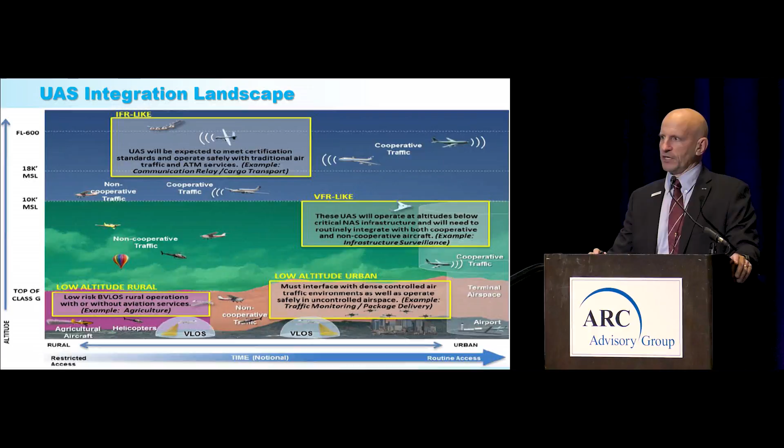And then just a situation of all the airspace where we enable UA to integrate in a non-segregated, non-cooperative, some situations, so that these UAs can detect and avoid one another and move throughout that airspace. Now, to do that, where we are today is looking at operations over people, expanded operations, which mean beyond visual line of sight. So if you want to do anything like an oil line inspection, power line inspection, those kind of things.

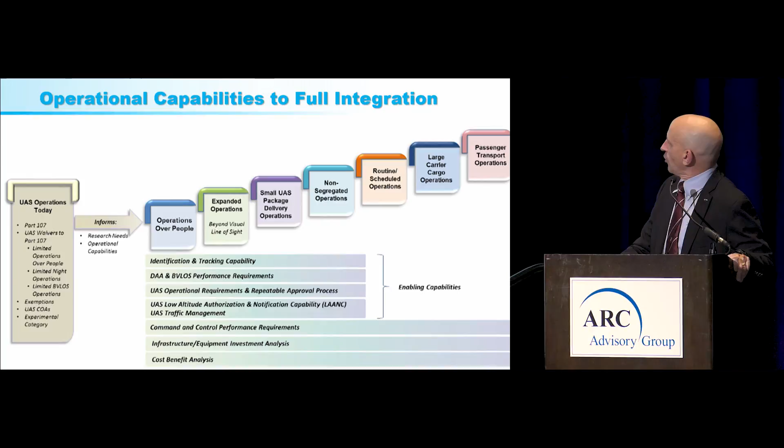And there's a lot of pressure on the FAA and our commercial folks to do small UAS. But we have to do the research and safely define things like how to ID a specific UAV. We were close to flight over people, but then Department of Homeland Security and the FBI said, now wait a minute, how do we know over a sporting event if that's a friendly UA or a bad one? And we couldn't answer that question initially. So we've taken a step back to do detection, flight pointing systems. That's that low altitude authorization and notification called LAANC.

Beyond visual line of sight and detect and avoid, we're going to see some projects that we have in that area trying to actually define what that's going to be to enable anything beyond your visual line of sight, which is a lot of applications in the commercial space. There's command and control performance. We want you to be able to not lose link to your aircraft. If you do, to be able to regain it, but then we don't want a cyber attack to get into that system and easily be able to take over your UA. So there's a lot of work starting in that area.

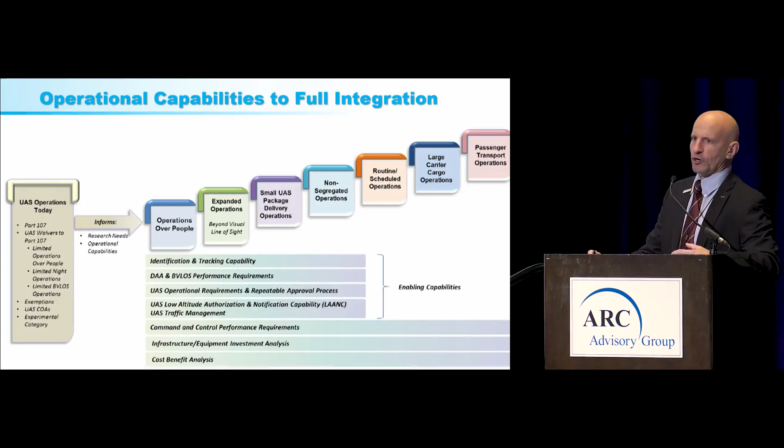So just a quick look at what we've done. Up top, we did some initial certifications, but with Part 107 for the smalls it became not so important. But we started looking into the detect and avoid program. They've surveyed the whole industry, tried to find out what were the needs, and the next phase, what I'll brief on another slide, is we're going to start doing testing to figure out what the minimum standards will be, what are the requirements for you to be able to fly a UAS beyond visual line of sight.

The two studies that I'm going to cover in detail, so I'll skip through now, are the collision severity studies. People are very, very concerned, rightfully so, of what happens when a UAV is flying around and hits somebody in a crowd. What happens when it hits my airplane that's coming in to land? We've done work there.

Maintenance, modification, and training. We've done a lot of work there. An airliner like a 747 has intensive requirements in that area. Obviously, you don't need that for your 2.7-pound DJI Phantom 3. But what do you need? What are the requirements? How do we scale that for the different sizes in between? A lot of work also on human factors, the design of the ground control station.

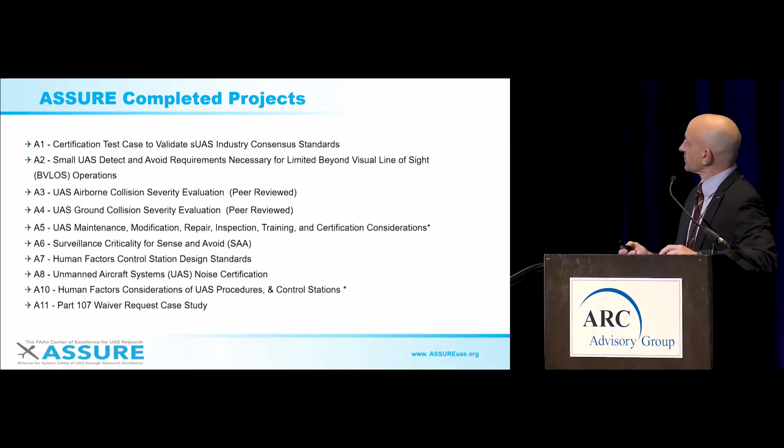So what we have currently going on is the secure command and control link and interference. A lot of concern about maintaining that link, the sanctity of that link, the control of that link, and then if you lose it, how to get it back quickly.

That group is forming the RTCA Special Committee 228, Working Group 2, on what those procedures will be. The FAA will just sign on to what these new industry standards will be. A lot of what we're doing now is not going right directly to the FAA for regulations. We're informing industry standards groups, consensus groups, of our recommendations for what the industry standard should be, the minimum standard should be.

If you move on, we have some follow-on work in the collision studies I'll cover. We do a lot of work in STEM. These kids today just love it - you fly a UAS around, you can teach them math out of that, you can teach them physics, and they won't even know they're learning programming skills. So we've gotten involved in some of that, and we're looking to expand that out.

A couple other issues that have popped up in some discussions is detecting and avoiding, counter UAS. Under our FAA mandate, the FAA has no authority to bring down a UAS, none. Matter of fact, Title 18 forbids really anyone from bringing down a UAS. There are some waivers that have been put in place for Secret Service and Department of Homeland Security in certain situations, and the FBI, but that can't happen right now.

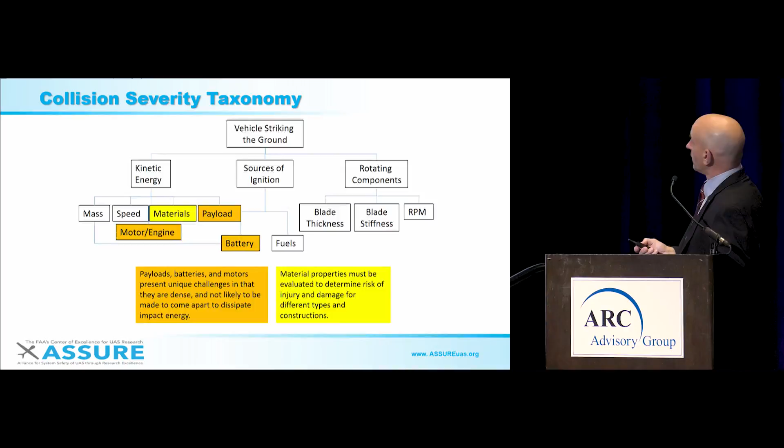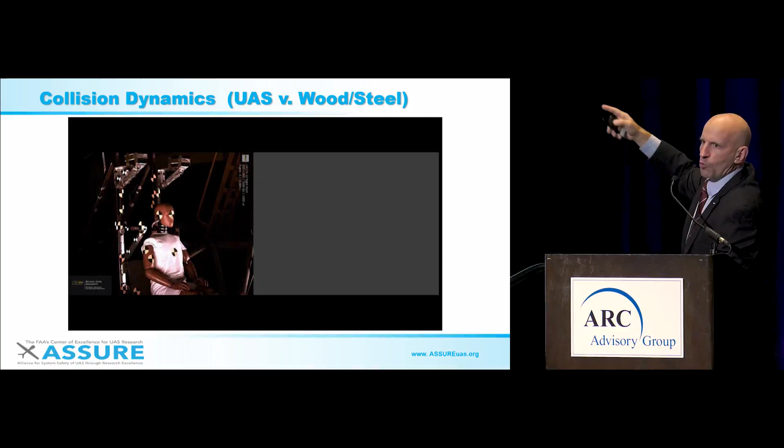What you'll notice on that one is it stays on the dummy's head. All that energy is transferred into the dummy. Eventually, it is retracted to protect all the equipment on the ground. You'll see it eventually leave, but that's a retraction wire that pulls it back up. There is no wire attached to the drone.

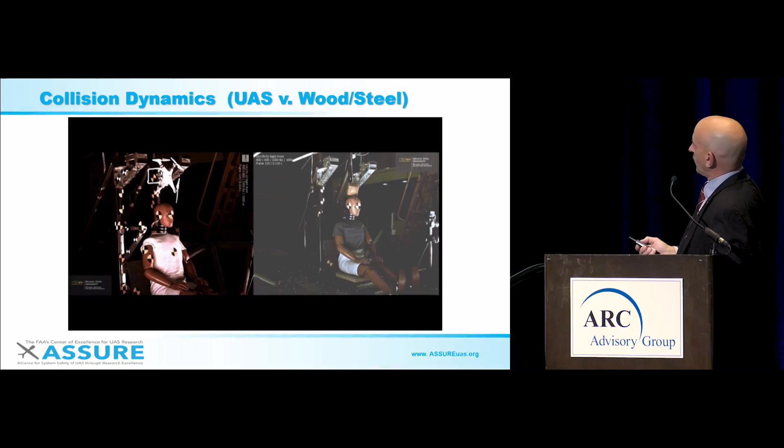So on the right, all that energy went right into the skull, and you can just see all that flexing and how far off the head that UAS leaps. That's all retained energy, that was not transferred to the head. Again, just one more time - and that's going to be useful in my next slide to show you what the impact of that is compared to what the FAA was doing.

Okay, so if you just look at the very bottom here, it says Range Commanders Council Standards. Let's focus on the right two columns closest to me, and the probability of head injury or head impact. On the bottom, it says probability of fatality from a head impact, a chest impact.

And you'll see almost 100% that you're going to die from a 2.7 equivalent DJI Phantom using the FAA standards. That's what they thought was going to happen. If you look at when we took a piece of wood and a piece of steel that they used to do the work of the Range Commanders Council, we correlated those results with the probability of head injury at 99 to 100. Okay, so if it's steel or wood like you planned, it will likely kill you if it hits you in the head at the speeds we were dropping these things.

Now, you go to that far left column, you can see the chance of fatality was 98 to 99% is what they were figuring for that UAV at 2.69, and the speed that it fell a little bit slower at 49 to 50 feet per second, was about still close to 100%. But if you go up to the probability of a head injury, it's 0.01% to 0.03%.

The FAA did not like seeing this. This could not be true. The dummies were not reacting like a real person would react. So they had us retest this and prove this all types of different ways. We're even doing more, I'll get to here in a second, to prove to them that it's the flexibility in these drones that was actually allowing almost an order of magnitude difference in what would hurt you.

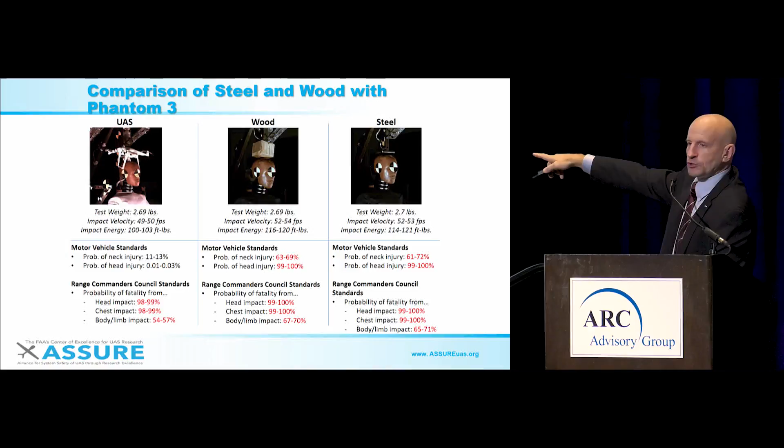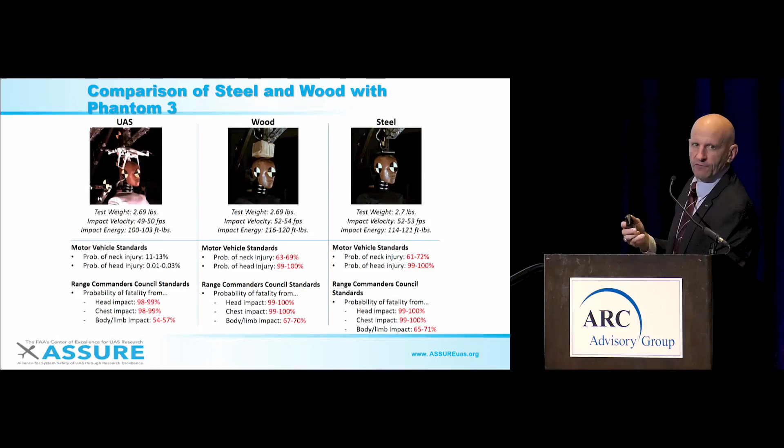So what the FAA thought would kill you at 2 pounds really wouldn't kill you till it was about 20 pounds - okay, they're likely to kill you. So they were over conservative and restrictive in what you could do with your UAS.

So the findings of this report, they went through all kinds of methods and means to try to figure out, okay, what do we need to regulate? Everything from toy standards to car crash standards. And what they found basically were 3 basic injury methodologies that cause problems. What's going to kill you is blunt force trauma, that impact, mass, and velocity hitting you in the head, neck, or thoracic region.

So that's where our focus was. But we also know, and we saw, a lot of lacerations, both in the modeling community - the toy industry's already set up a lot of standards in this area. So what we told the FAA for operations over people, our recommendation is that you have blade guards on. And the industry is already adjusting based on our report.

What looks worse is that little kid who gets a cut and is all bloody - really there's no risk to life, but it looks horrible, right? So we want to get that squared away.

Canada was regulating on puncture - what was the likelihood that you'd get punctured and stabbed? Well, that depended so much on the angle and exactly where that UAS hits you. What we recommended was that we don't use that metric. Blunt force trauma will work, and that's where we focused.

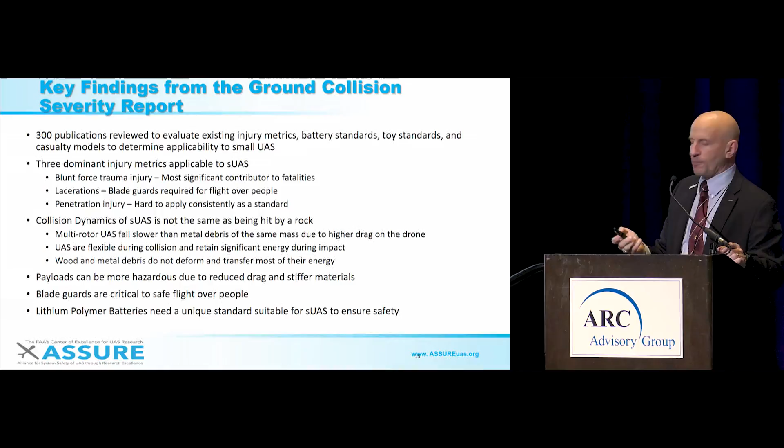They also saw that the UAS flexes, but the cameras don't, and the motors don't - those hard parts are something we're going to have to look at more in the future.

So the follow-on: this has been approved. We're working more studies, doing different UAS to validate that it wasn't just this DJI Phantom and fixed wing that we used. We're validating it on models and test dummies, and I'm looking for human volunteers - they said I'd find a few here today that we could actually throw some of that at.

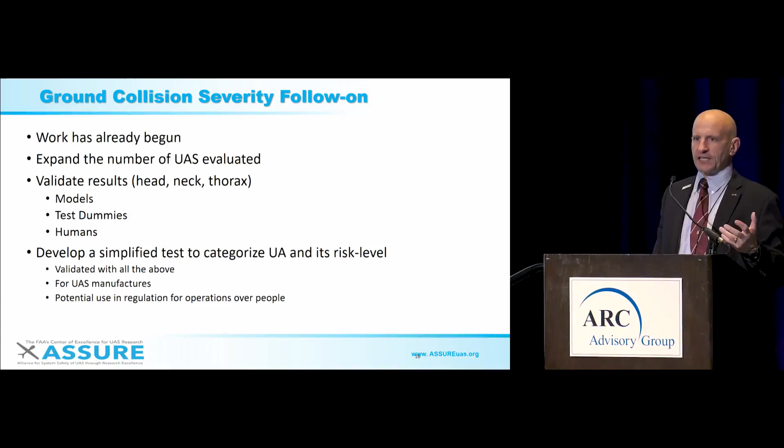Actually, we're doing some cadaver matching to validate the data, because there are a couple of people in the FAA who've been doing this forever who just don't believe it's true, and they think the crash test dummies are lying. So we found some cadavers that can talk back to us through sensors, and they'll let us know if it's true. Then, based on that, the goal is to develop a very simplified test so that anybody who builds one of these UAS will be able to define that flexibility, put a risk number on it, and that'll allow operations over people in accordance with the safety ConOps you develop.

So that's a good news story we can go to. On the air-to-air study - didn't surprise me any, but this is a bad news story. Anytime we have two aircraft hit each other in the air, it's not going to be good.

This wasn't a risk study, I have to hammer that down - risk also looks at the probability of impact. What we actually did is take the absolute worst case scenarios, center of mass against center of mass, to see what would happen when we hit an airplane.

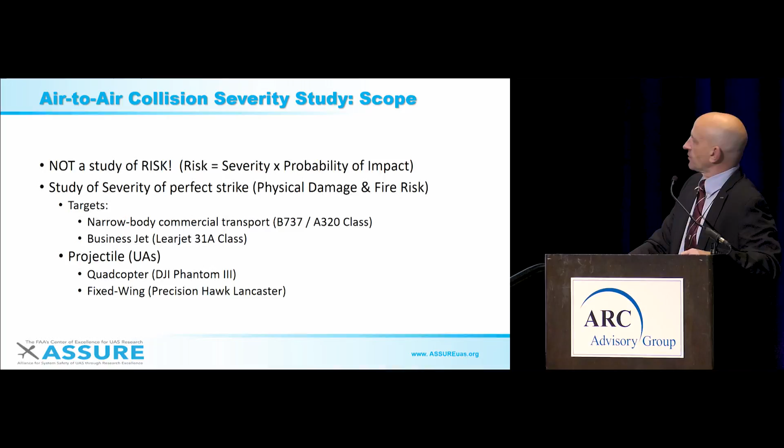We used a 737 A320-class aircraft and a business jet, the Learjet 31. The UAS projectiles were the Phantom 3 and a Precision Hawk Lancaster.

It's a bit of an eye chart, just green to red. Green is not so bad, red is really bad. The green is like a little dent. Yellow is a deeper dent into the structure. That amber, darker yellow, means there's a puncture - you actually puncture the skin somewhat. And red means you've damaged the interior of the aircraft.

The battery study - I'll discuss that now. With lithium polymer batteries, they found that when it hits at high speed, even if parts go inside the aircraft's wing structure, it's so destroyed there's no fire. Or if it doesn't penetrate at all and just shatters and goes off, there's no possibility of fire. But in some slow-speed modeling, when the battery wedged itself in there, there was an increased risk. We don't know yet, we haven't been able to define that risk. We're looking to do more battery studies in the future on potential fire.

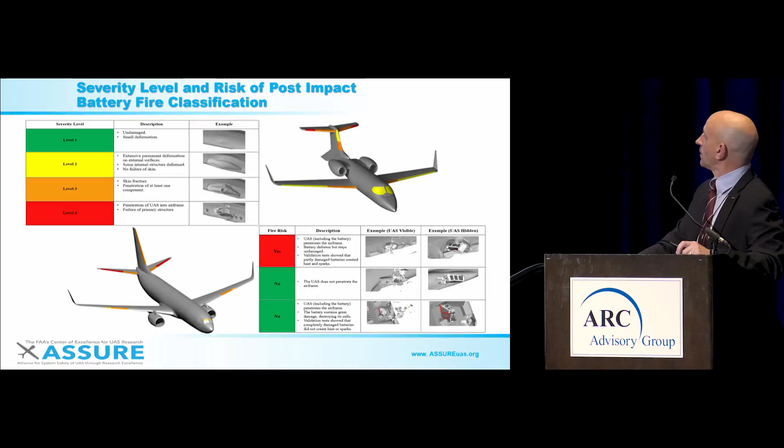For the airliner, you can see pictures here of the two airliners, with the quadcopter on the left, which is a little smaller than the fixed wing. In all cases, the fixed wing is worse - I'll explain why. The quadcopter is less so. You can see the damage to the aircraft is less for the commercial airliner because of the higher required standards for carrying passengers versus a biz jet. Same thing down here.

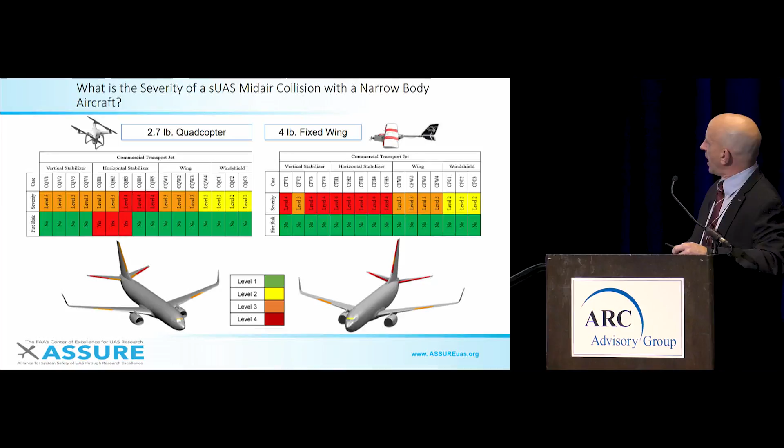Quadcopter less bad than the fixed wing.

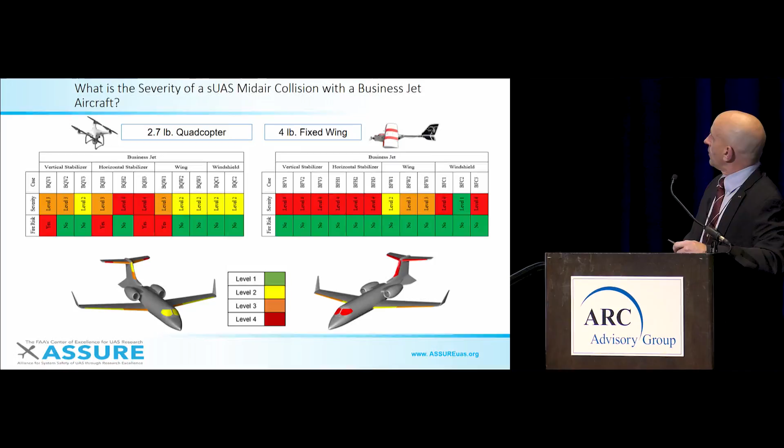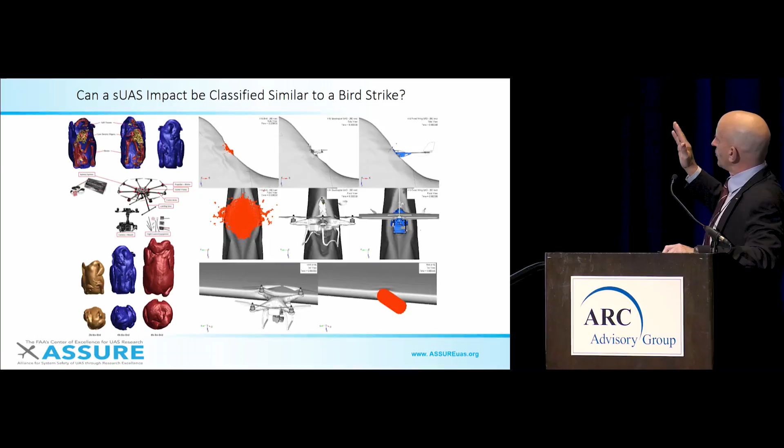So as you look at these hits on the left, we were asked to compare it to a bird strike. That red blob is basically a model of a bird. The middle structure is a quadcopter, and the far right is a fixed wing. And in each case, as you move across, the damage caused by the bird is less than what's caused by

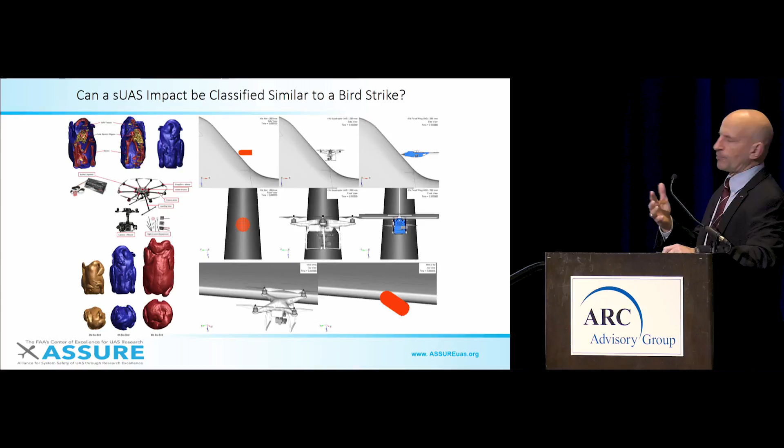the quadcopter, which is less than caused by the fixed wing aircraft. So in comparison to bird strikes, UAS are worse than bird strikes. So the standards out there that the FAA applies to birds need to be adjusted for UAS because they're stiffer and they're aligned. We're going to talk about that here.

As a UAS picks up speed, all my engineers in the room know this, energy equals mass times velocity squared. So as the mass increases, we get more structural damage. As velocity increases, it exponentially increases the damage to the aircraft. So high-speed impacts are bad. The slower the aircraft is, obviously, the better.

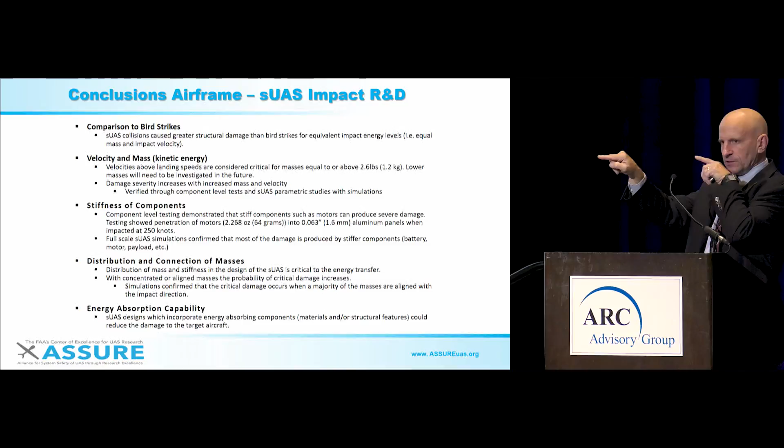Moving on, we also looked at engines. We took an engine that the FAA model. It doesn't represent really any engine out there. We just did it for a quick look to find out if we're going to do more engine studies.

And what we found was the same thing. The fixed wing is worse than the quadcopter. The further out on the fan blade you hit, the worse the situation. And the higher the speed of the fan blade, so a takeoff scenario, causes the most damage.

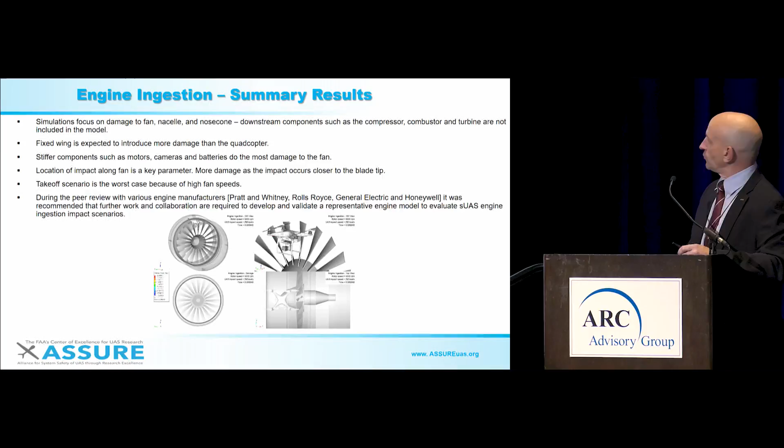We are working with the engine manufacturers right now. They're recommending that they all collaborate and develop an engine for us, none of their own, but using capabilities of all their different engines to do the next study. So we're on path to do this, and the bottom line is we do not want airplanes to hit.

So a big key here is detect and avoid. We've got to keep aircraft apart. If they find each other in airspace, we're going to have bad things happen. We're looking at rotorcraft and GA aircraft because they're down in this environment where a lot of these smaller UASs are.

One thing that came out in the study was, well, you did all worst case. Is the boundary layer going to have any effect? As air flows over a wing or around a wing or over the cockpit, will it have an effect? We did not look at that in the first study, but in the follow-on work we're doing a quick look at that to see if it decreases the probability of a direct hit and reduces the level of damage.

And then we're working on the engines. The engines, it's never good, even when a bird goes down an engine, it'll trash an engine. But you've got to be able to shut down the engine. It can't vibrate. It can't fall off the wing. We'll be looking at all that with the engine manufacturers, with the hopes to design UAS in the future to mitigate damage to engines.

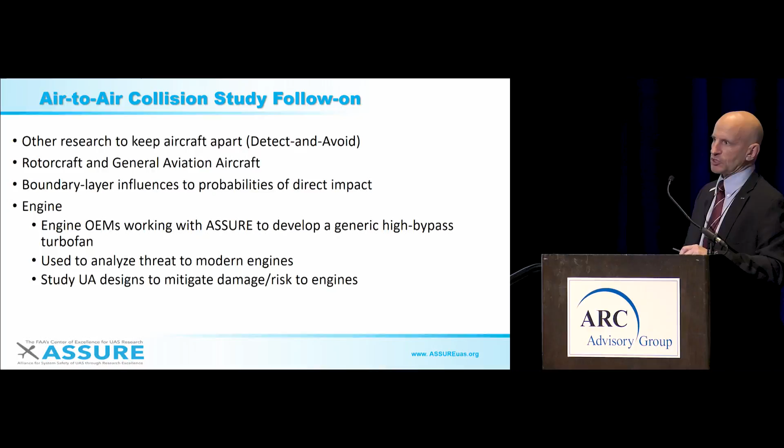And with that, I'll leave questions to the panel discussion, but that's kind of where we stand today. And I would say just keep the seriousness of some of these things in mind. They're not toys, even though a lot of our kids are running around with them like toys. They are aircraft, and when they're in the national airspace, they can cause quite a bit of damage. Thank you.